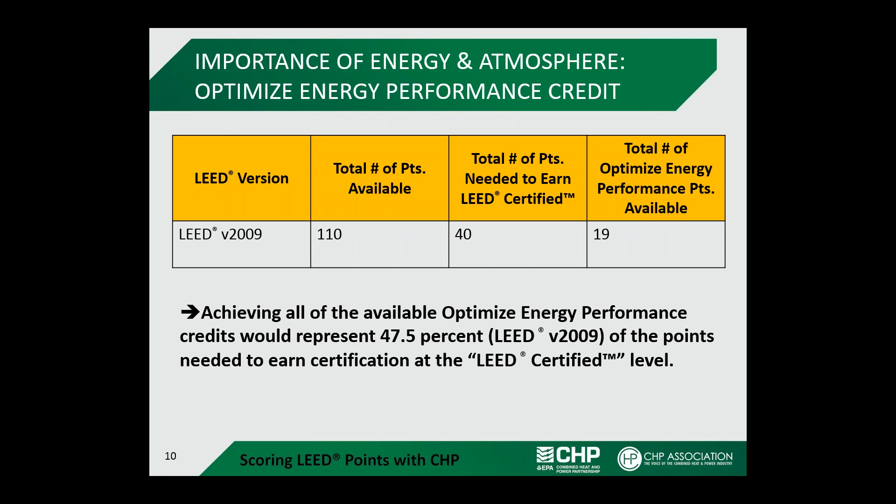One thing to point out is that every project is different, and the impact CHP will have is dependent on building-specific variables, such as the performance parameters of the specific system, how many hours the system runs, power-to-heat ratio, and the useful power and heat outputs relative to the specific building load.

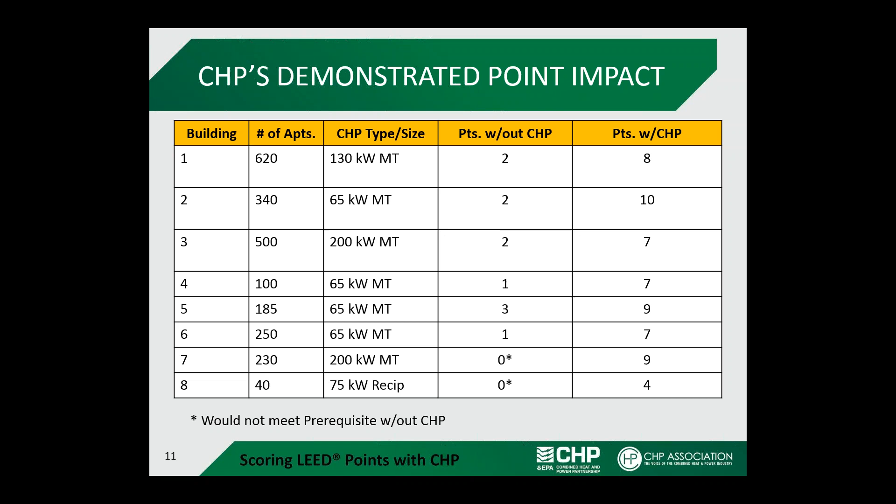As I mentioned, the credit category where CHP has the biggest impact is the Optimize Energy Performance Credit. Under this credit, project teams have 3 options for earning points. Options 2 and 3 are not really applicable to CHP. They involve implementing prescriptive measures outlined in ASHRAE Advanced Energy Design Guides, so CHP doesn't really help a project earn points under either of these options.

Option 1, however, involves running a whole building energy simulation using an energy model of a baseline building that meets the prescriptive requirements of ASHRAE 90.1 2007 and LEED 2009, and another model for a design building that includes all of the energy efficiency measures that a building plans to implement, which would include the CHP system.

For people who aren't aware, ASHRAE 90.1 establishes minimum requirements for the energy efficient design of buildings and provides prescriptive measures that define the minimum efficiency of things like building insulation, HVAC efficiency, etc. Meeting these prescriptive requirements is what establishes the baseline building for the purpose of comparison in the LEED calculation.

So using option 1, the design building must demonstrate a minimum of 10% savings in energy cost compared to the baseline building. Anything over a 10% savings results in points earned on an incremental scale based on the savings achieved. More points are awarded as energy cost savings of the design building increase compared to that of the baseline building. So the key point here is that points are awarded based on energy cost savings, not on energy unit savings.

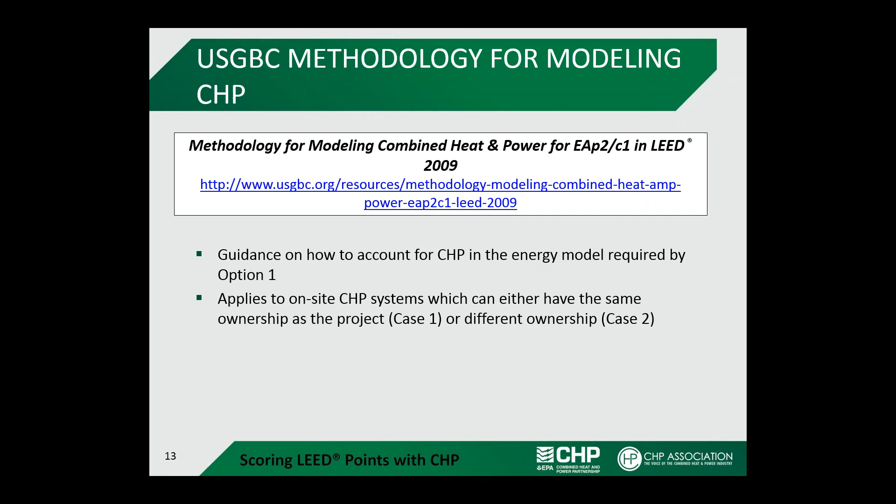Next slide. Basically, there are 3 steps to the methodology. First, the energy requirements for the baseline building, which is the one that meets the ASHRAE 90.1 standard, are estimated using the energy model, and based on the model output, energy costs are calculated.

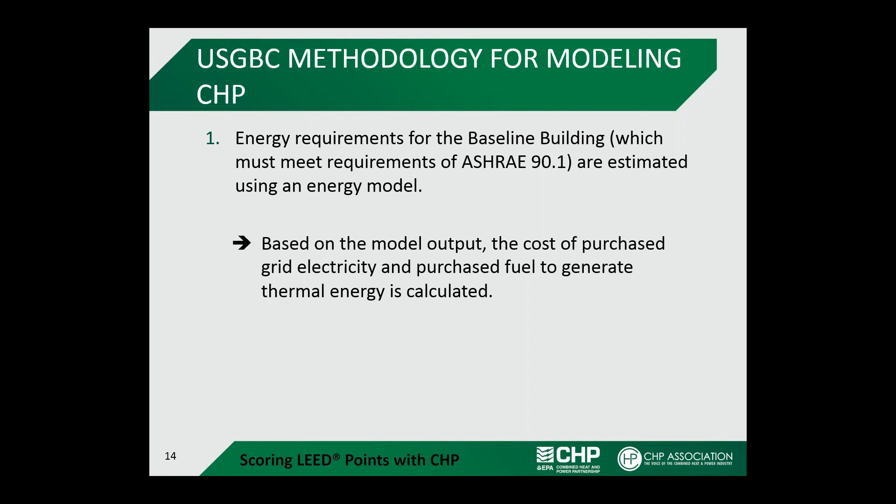The same process is followed for the design building, the one that includes CHP, as well as any other energy efficiency measures the project plans to implement. The key is that the design building with CHP only needs to account for the cost of fuel used in the CHP system, plus any residual utility electricity and supplemental thermal needed by the building. The electricity and thermal outputs from the CHP system are considered free in the energy cost comparison, which is important.

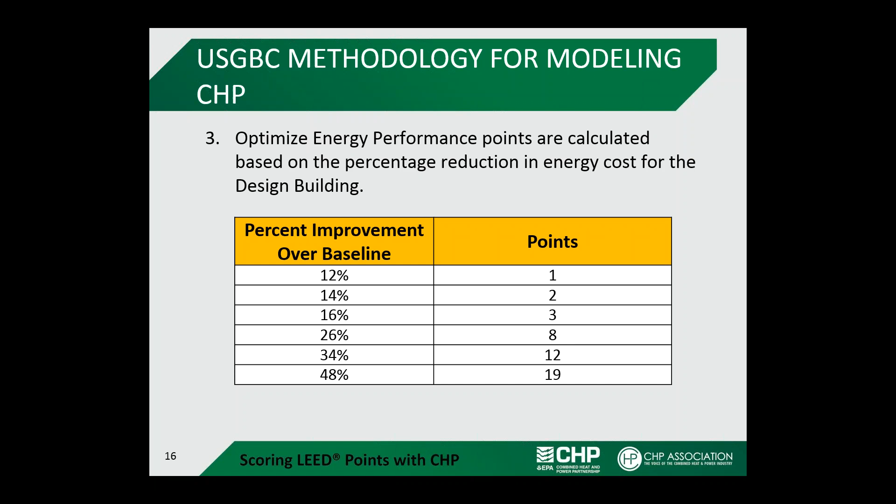The key behind CHP's ability to earn points is its enhanced efficiency over separate heat and power, meaning purchased utility electricity combined with an on-site boiler. CHP systems typically achieve total system efficiencies of 60 to 80%, compared to approximately 50% for purchased utility electricity and an on-site boiler combined. Increased efficiency means less fuel and thus energy cost savings. Also, by producing on-site power, CHP reduces purchases of grid electricity. Purchasing natural gas, the usual fuel for CHP, is typically cheaper than buying grid electricity, so you get cost savings.

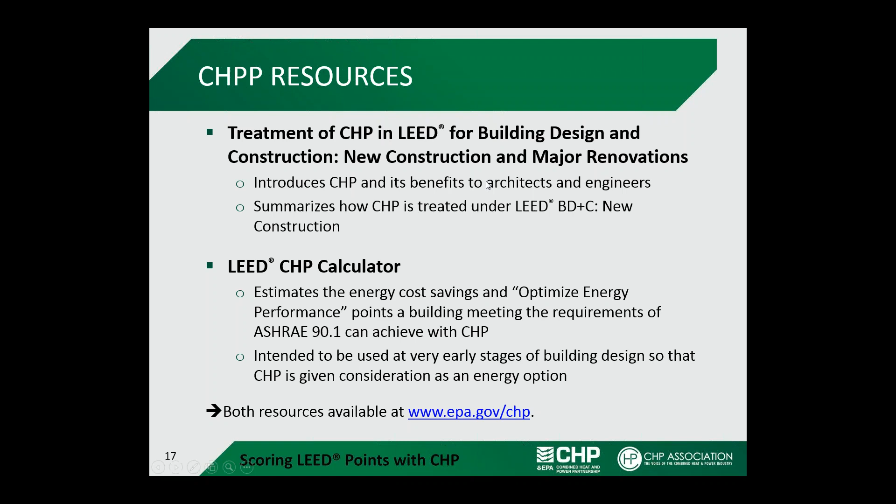That about covers it, but I'd like to finish with a few takeaways we think are important to leave everyone with. First, CHP can have a dramatic LEED point impact. We've seen projects earn up to 9 to 14 points with CHP compared to separate heat and power, which is really significant given that you only need 40 points to become LEED certified.

Second, CHP has lots of other benefits for buildings: energy cost savings, environmental benefits, enhanced power reliability. So getting these extra LEED points is really a bonus—you're going to want to implement CHP for a number of other reasons besides just getting LEED points. We also hope that for your next LEED project, you think of CHP from the outset as a potential energy strategy. It requires some planning and investment up front, but the benefits to a building owner can really be big. Finally, we at the CHP Partnership are here to help.

We have lots of tools and resources concerning CHP, including the ones I just went over specific to LEED, as well as a partner network of CHP professionals. I'd really encourage you, if you have any questions or would like assistance understanding how CHP fits within the LEED rating system, to please contact us. My contact information is on the next slide, as well as how to contact the CHP Partnership. So if you have any questions, feel free to contact us either way.

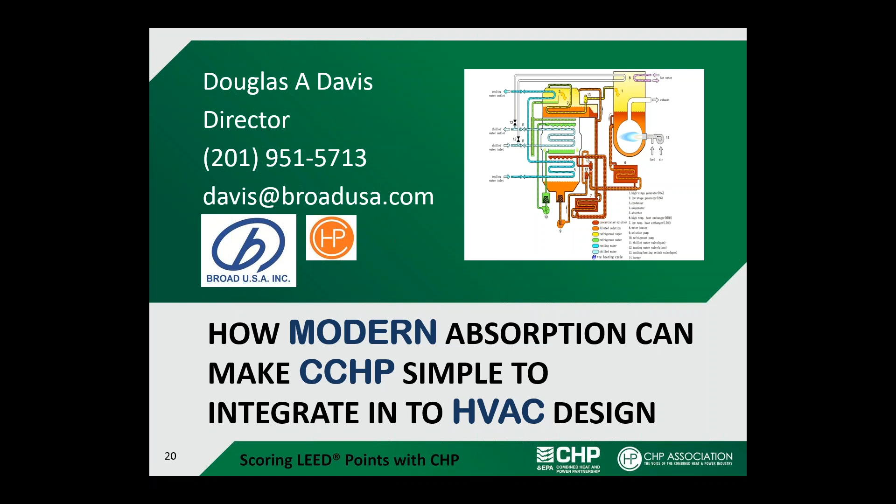The next 10 minutes or so, we're going to talk a little bit about how modern absorption can make CCHP simple to integrate and design into your HVAC systems.

To begin with, I thought it'd be good to state what an absorber is. Basically, an absorber is a thermally driven chiller that makes cold water. Typical application range for the chill water is about 44 degrees Fahrenheit and is usually adjustable a couple degrees in both directions.

Commonly, absorbers have been applied in buildings for almost any type of facility, ranging from schools to universities to hospitals, offices, retail, and data centers. We are seeing a big growth in the CHP market. I'd say about 70% of absorption sales today is tied to some form of heat recovery or combined heat and power projects. Absorbers have been around for a while.

They're also known by a couple other names, such as absorption chillers, or perhaps if a machine is actually burning natural gas directly, people often refer to them as chiller heaters, since they not only produce cold water for air conditioning, but they can also create hot water for heating a building or even domestic hot water.

Lastly, I was hoping to touch lightly on what's new about modern absorption units. Over the last decade or so, the efficiency of the technology has gotten substantially better than it was in the past, and also its ability to unload quite efficiently. Today, with an HVAC application, it's really important for machines to be able to unload from 100 down to 10% as the load profile in the building changes.

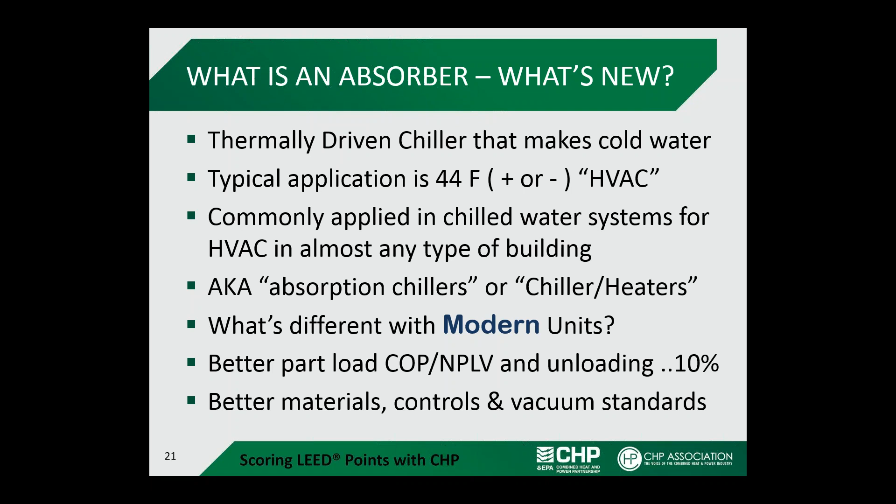So absorption has been around for almost 70 years now. This technology was actually pioneered in New York State, and what we're hoping to show here is just a couple pictures about how the technology has changed in the last decade or so.

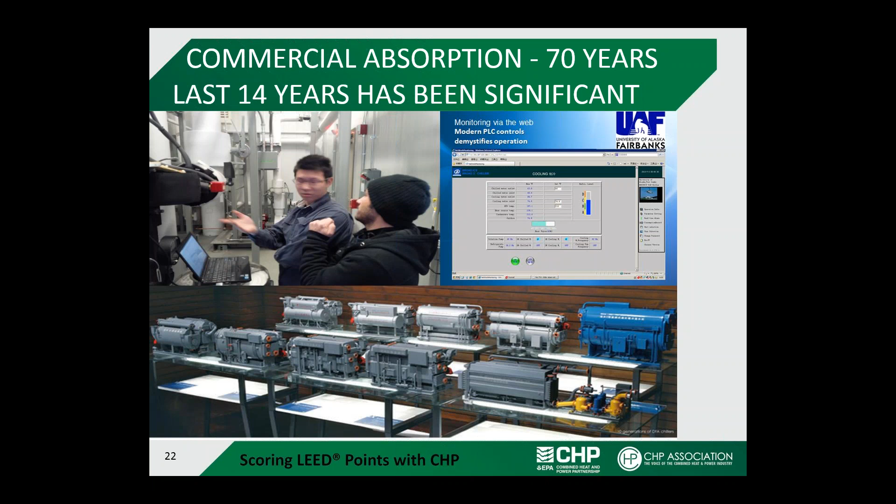Modern absorbers today are about 40% more efficient than they were 15 years ago, and as you can imagine, information technology has really transformed this technology into a much more user-friendly chiller, in the sense that modern controls and using the internet to actually watch these machines remotely really allows the operation to be demystified. It's kind of simple now for almost anyone, even with a very basic understanding of chill water operation, to be able to diagnose and troubleshoot machines should they need a little bit of TLC.

Next slide. So a little bit about our company. Broad is a manufacturer of absorption chillers. We also monitor these machines for life and provide service and training on absorbers.

What really is truly novel about absorbers today is they can actually handle up to 3 different thermal inputs, which really makes them ideal for combined heat and power applications, where you might have various different forms of waste heat that need to be recovered and utilized in air conditioning. Next slide.

So to highlight why modern absorbers are good for LEED projects: many building designs have traditional heat loads that can make CHP effective, but depending on where the building is located and the time of year, many commercial office buildings or hospitals will have a dramatic drop-off in heating requirements in the summertime. By turning cooling loads into thermal chillers, you can turn cooling loads into heat loads, which allows you to recover waste heat off power generation and drive the energy back into the building for a useful purpose.

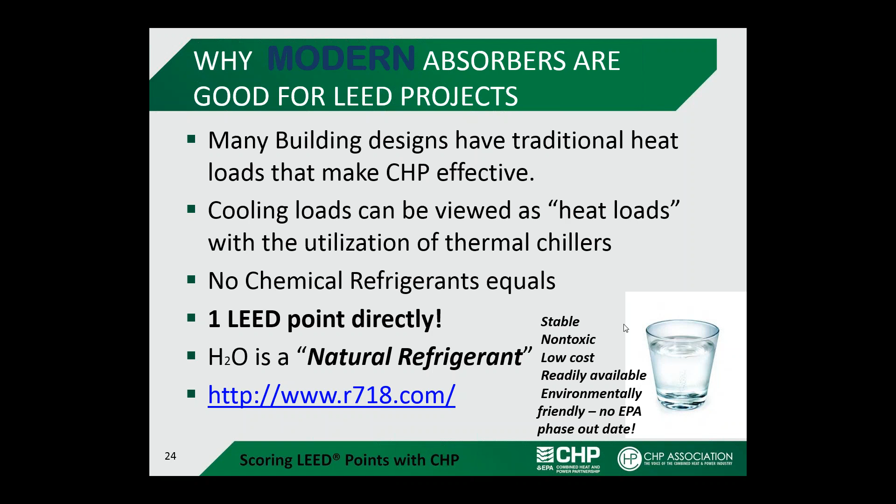In most combined heat and power systems, the job generally begins with the selection of a prime mover. Depending on the type of prime mover you design your system around, you'll have various forms of waste heat. But the key factor is all these different forms of waste heat can be used to power a modern absorber. One of the new prime movers we're starting to see traction with in North America are fuel cells. Not all fuel cells, but some, as a byproduct of a chemical reaction, actually generate hot air around 750 degrees, which is more than enough heat to power a two-stage high-efficiency absorber.

Another popular choice for prime movers are turbines, both large or small, sometimes referred to as microturbines. Again, the byproduct of combustion of natural gas generates sufficient heat to power usually a double effect absorber, or you can convert that waste heat into steam or hot water and then choose either a single or two-stage absorber.

Also, reciprocating engines by far seem to be a very popular choice still in the combined heat and power industry. Just like the car you drove to work today, you have both tailpipe exhaust and what's commonly referred to as jacket water, which keeps the engine block cool. Typically the exhaust temperature off the tailpipe might be 800–900 degrees, and the jacket water usually somewhere around 200 degrees, both sufficient amounts of heat to power a modern absorber.

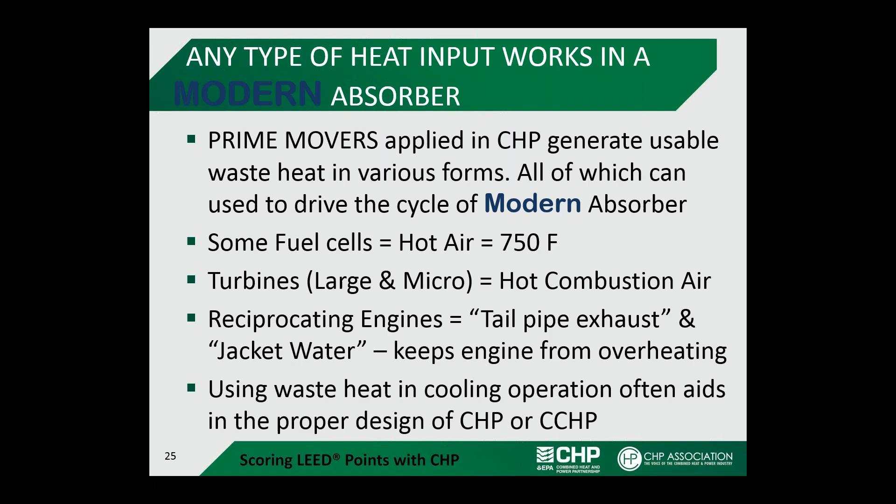So to summarize, by looking at thermal chillers, you can often use the waste heat in cooling operation, and will sometimes add to the size or capacity of the combined heat and power system, because you'll be able to utilize the waste heat in months where the heating load might fall off.

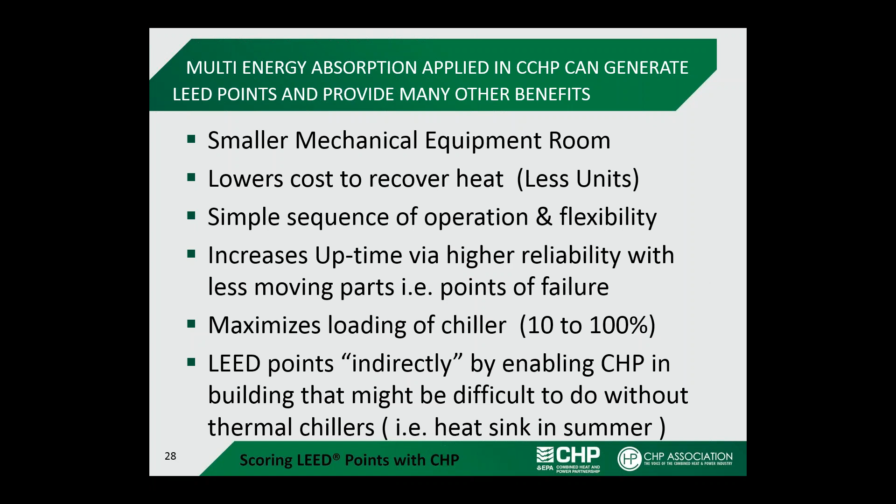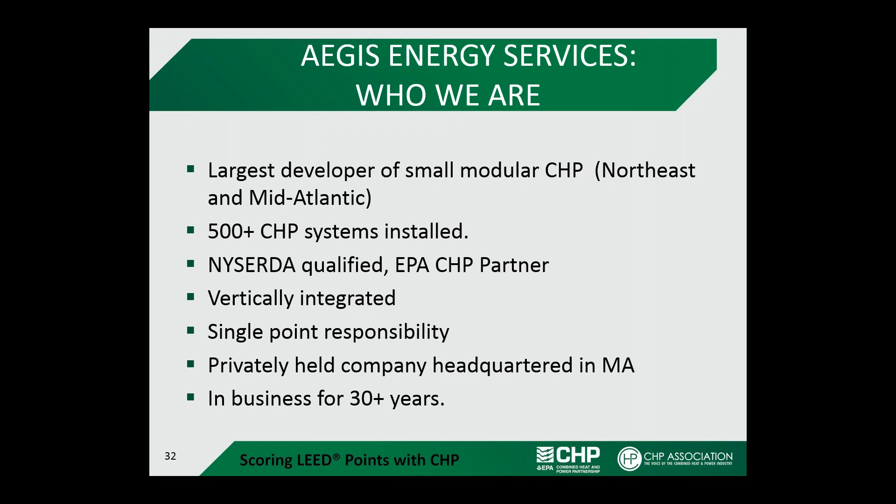The company is vertically integrated from engineering, manufacturing, installing, maintaining, and often owning and operating systems. This structure provides single source responsibility and accountability to its clients. It's a privately held company headquartered in Massachusetts. It's been in business for over 30 years. Next slide, please.

This is the basic architecture of our products, which are natural gas-driven reciprocating engines. In red are the basic heat recovery components. In green are the connections we use to interface with the building. I want to call attention to the red circled outputs of the system, which are highly valuable electricity and thermal energy. When comparing the total BTUs of these outputs with the natural gas input BTUs, the efficiency can be 80+%, which should be contrasted with the 30% efficiency of a central power plant.

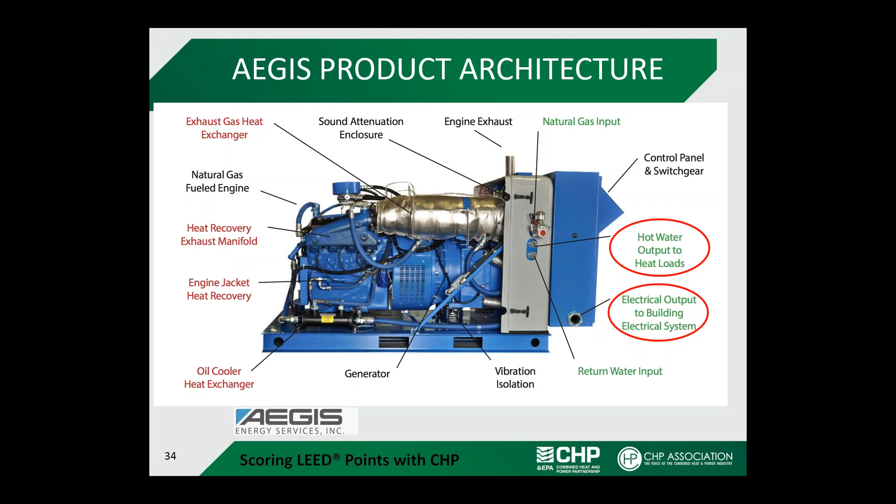Our CHP systems are modular and scalable, which means they can be used alone or combined for use in larger applications. Sizing the system for thermal loads and electrical loads requires proper sizing for maximum efficiency and savings. With small modular systems, there is no need to purchase and install something that doesn't fit or is oversized. Consistent with plug and play is the fact that most of the system and connections are pre-built in the factory, such as the pump and load modules, making installation relatively quick.

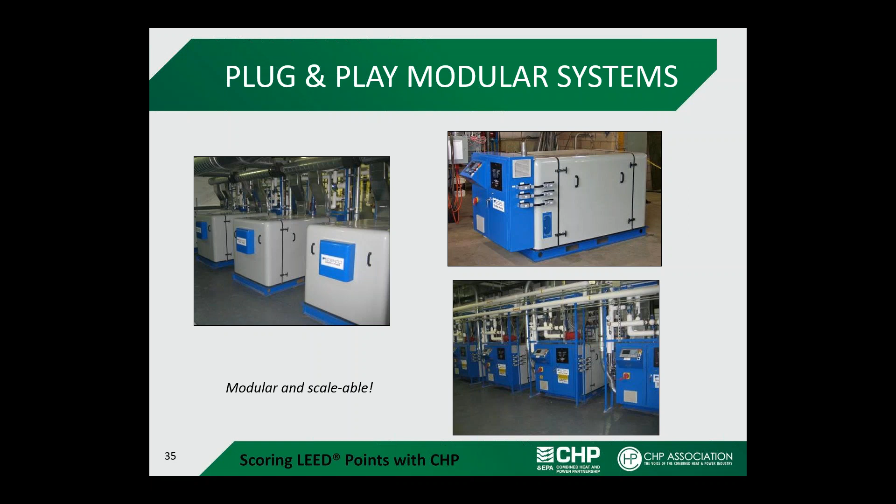These units are equipped with microprocessors and are IP accessible, which allow them to be remotely monitored by Aegis at its headquarters, thereby allowing for very high run times and capacity factors, making sure that the promised energy savings are achieved. This monitoring allows for independent operation, not requiring any building resources. Lastly, Aegis provides a comprehensive maintenance program, thereby ensuring long system life and uptime.

Since not every building is a good application for CHP, although many are, these are the characteristics that make a site a good fit for CHP. These characteristics make CHP a great technology for multifamily buildings, hotels, hospitals, nursing homes, health clubs, all of which are our clients.

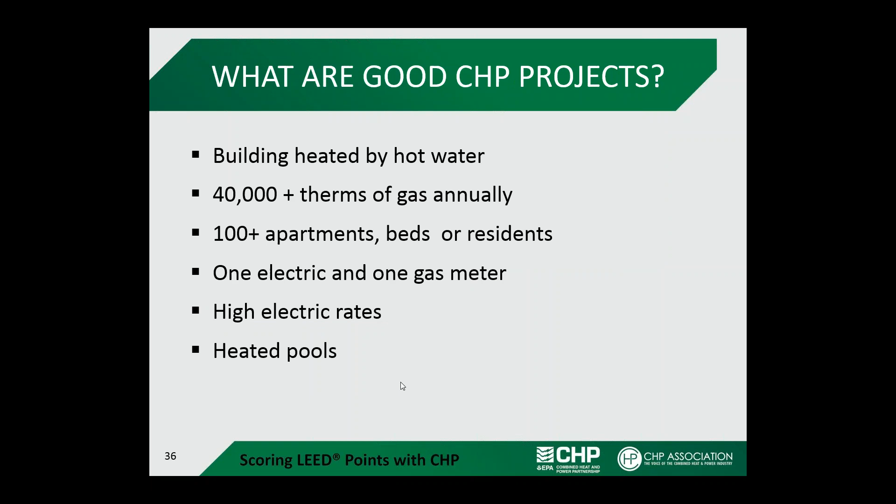Here is a quick review of the guiding principle of CHP design for maximizing energy savings. As discussed earlier, the value of CHP lies in its high efficiency, which stems from use of the waste heat that the engine produces. Therefore, in order to maximize this efficiency, the system is best designed to be thermal load following as shown.

Aegis initially sizes an overall CHP system to match the building's thermal needs. It employs hot water storage tanks for peaks. The CHP modules are adjustable, have variable speed in order to match the building heat and hot water. If the thermal demand drops below that level, the system pauses to avoid heat dump. The only time there's a heat dump is if the building is performing electric peak shaving.

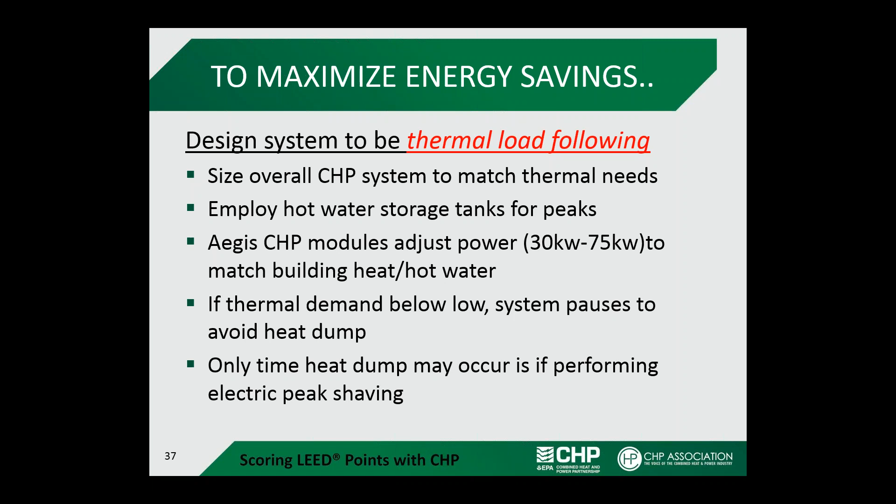Let's start with the first of two case studies that I wish to present. The first is the case study called the Larstrand in New York City, which is a 184 residential unit and retail space building, 200,000 square feet with 24 stories, consisting of market rate and affordable rental apartments. This building is in its final stage of comments, awaiting silver certification. Aegis worked with Dagher Engineering, which was an engineering firm that helped design this building.

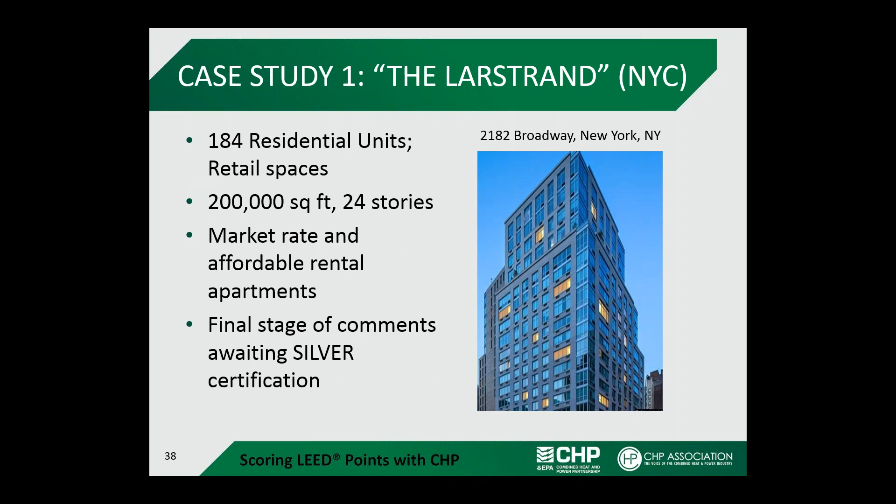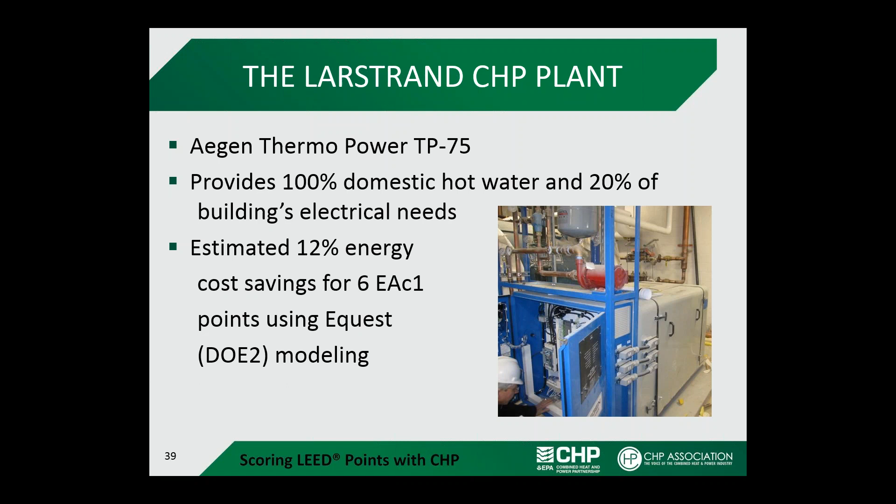After reviewing many different options for energy savings and employing some building envelope and other strategies to earn the minimum energy credit of 1 point, Dagher and Aegis performed a feasibility study showing building thermal demands and electrical demands versus CHP output. That study pointed to a strong argument in favor of CHP. Subsequently, Aegis engineered and installed the CHP plant as shown, with one Aegis ThermoPower TP75 kilowatt unit, which provides 100% domestic hot water and 20% of the building's electrical needs. The estimated 12% energy cost savings provided 6 optimized energy points using an eQuest DOE2 modeling program.

Here's a worksheet that Dagher gave us showing the actual point contribution that CHP earned towards the overall certification. Essentially, they earned 1 point in the minimum energy credit by saving 12% over the baseline building by employing building envelope and other strategies. Then, post-CHP, the building saved an additional 12% using CHP. This combined 24% gave them an additional 6 points under the optimized energy performance category.

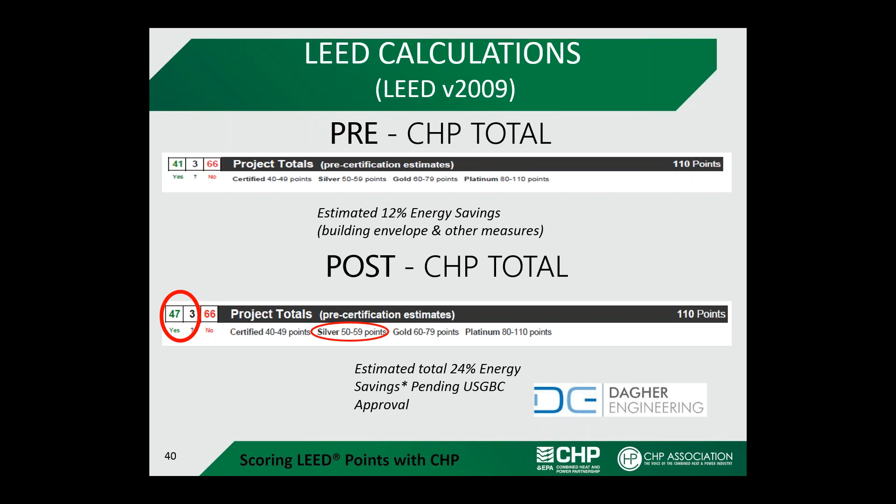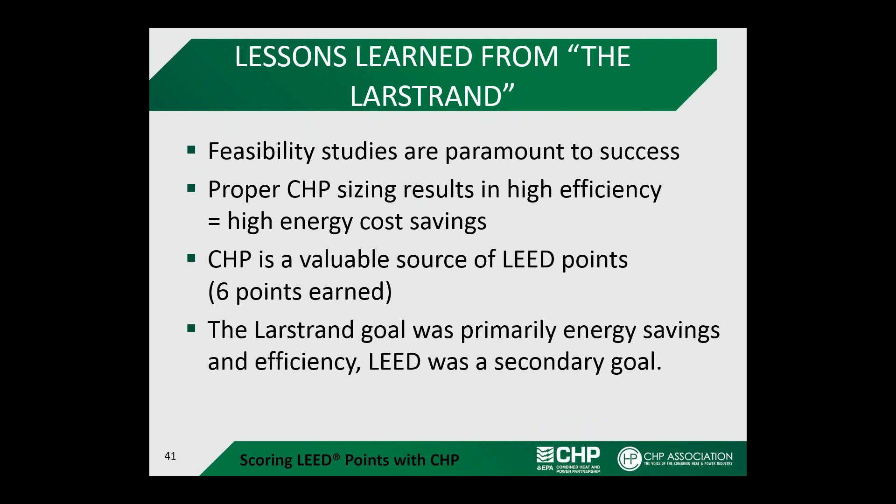In speaking with the engineers at Dagher and the building developers, we gathered these lessons learned. First, that feasibility studies are paramount to success, and that proper CHP sizing results in high efficiency and high energy cost savings. CHP is a valuable source of LEED points, and the Larstrand goal was primarily energy savings and efficiency. LEED was a secondary goal.

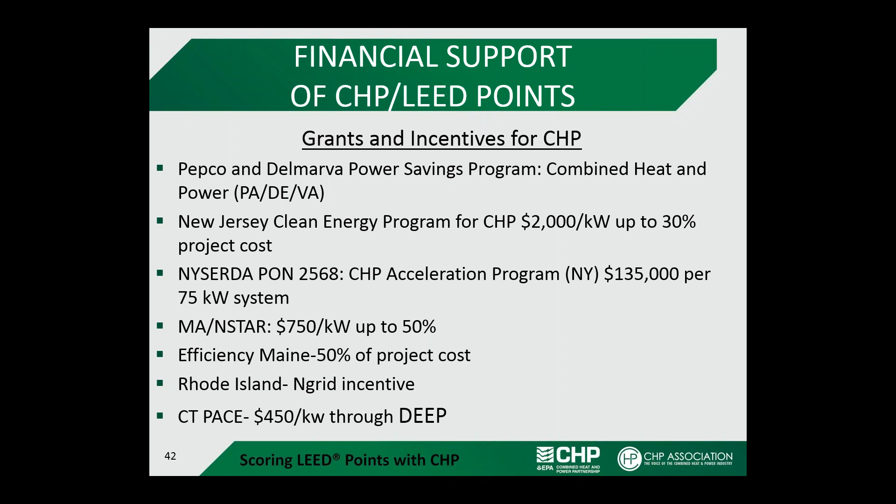Let me take a break here to briefly discuss some financial support for CHP projects. Many of you are aware of the incentives given to solar and wind, but you may be surprised that CHP has also support from local, state, and federal governments as well as utilities. Here is a small sample of what is available.

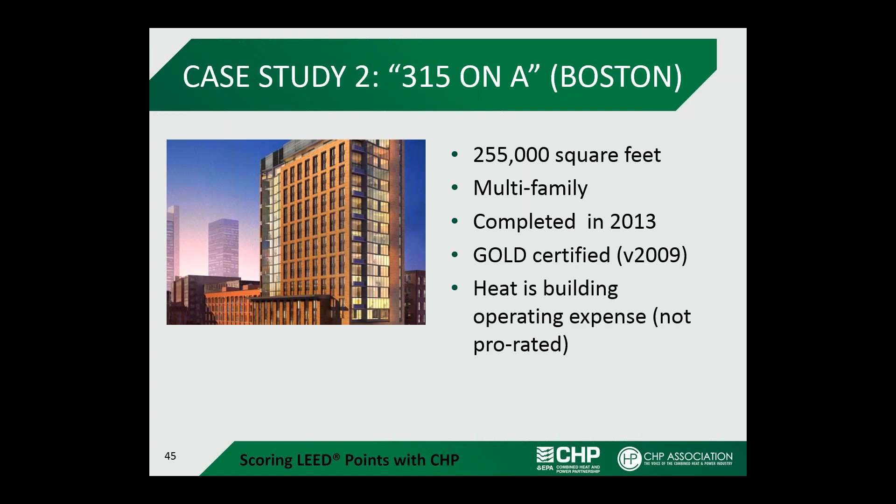This case study is a building called 315 on A, located in Boston. This building employed a shared savings agreement with Aegen, as was previously discussed. This is a 255,000 square foot multifamily building, completed in 2013, and has been gold certified under the V2009 LEED system. The heat in the building is an operating expense and is not prorated back to the tenants.

A feasibility study was conducted early on here also and rendered support for CHP as a good fit for this building in order to reduce energy costs. The plant consists of an Aegen ThermoPower 75 kilowatt system. It provides 100% of the domestic hot water heating and 80% of the building heat. The system provides 28% of the building's electrical load. The CHP system earned 4 of the 8 points under Optimize Energy Performance Credit, very similar to the previous case study I presented.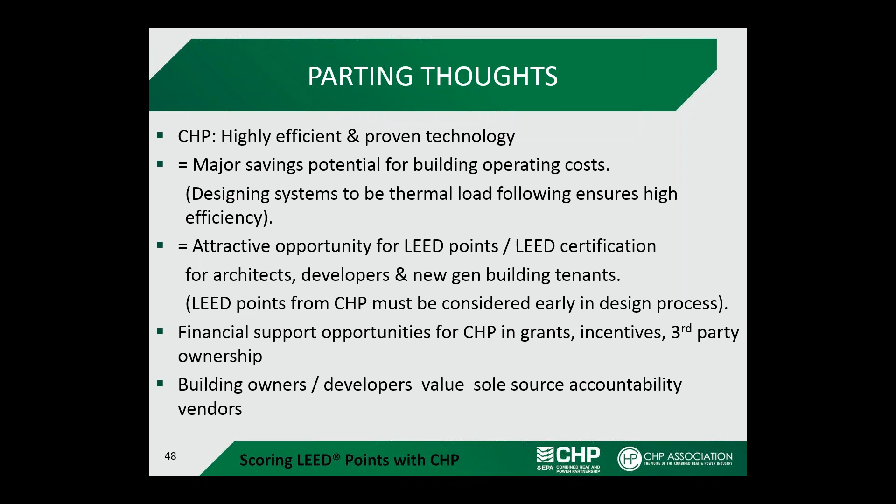Some parting thoughts. CHP is a highly efficient and proven technology, thus resulting in major savings potential for building operating costs, provided that the systems are designed to be thermal load following. These savings present an attractive opportunity for LEED points and LEED certification for architects, developers, and new generation building tenants who expect to live in LEED buildings. As mentioned earlier, these LEED points from CHP must be considered early on in the design process. Financial support opportunities exist for CHP in the form of grants, incentives, and third-party ownership, and building owners and developers value sole source accountability vendors.

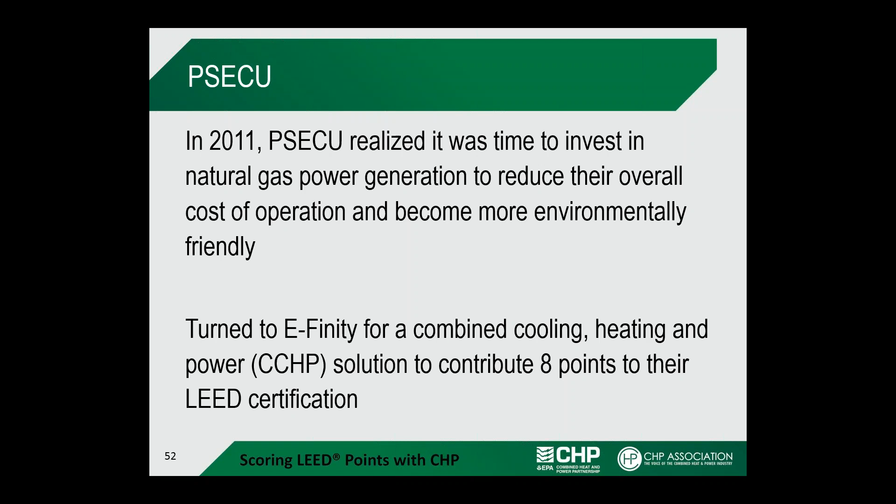In 2011, PSECU realized it was time to invest in natural gas power generation, benefiting from shale gas in the Marcellus region not far away, and they incorporated that into their overall cost of operation to become more environmentally efficient. They turned to us with an interest in the Capstone microturbine for a combined cooling, heating, and power system solution, and that overall solution contributed 8 points to their LEED certification.

It took about 3 years of schematic design and development to put the picture together for the combined heat power portion. Alan Bruner, the project manager at PSECU, was committed to the project along with the CEO, and Pete Spicer, the facilities manager. You need that commitment in any CHP project to have those champions to move a project forward. The plant was started in October of 2013. It's one of 352 buildings in the state of Pennsylvania that holds a gold certification level.

Requirements for the system: PSECU was looking for reliable on-site electricity, space heating, cooling, and chilled water. They teamed with us and UGI Performance Solutions, a local energy services company, to develop the generation solution, which utilized the Capstone natural gas-powered microturbine. In their case, it was a C800, which I'll speak to.

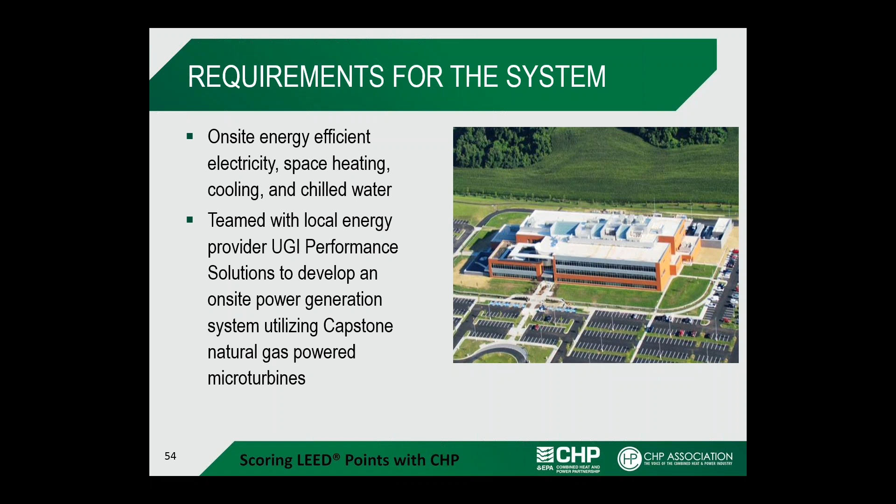The certification optimized the performance of the building that generated approximately 37% energy savings due to the on-site cogeneration system.

The system is comprised of really just 3 components: the Capstone turbine, the C800 dual mode microturbine as the prime mover, with 4 separate C200 modules in there that allow the unit to scale up or down depending on the thermal priority need of the building. The engine will run all year long, even during maintenance cycles, because you only shut one of the 200s down at a time. So the client enjoys thermal and electrical production 24/7, which also adds to the 99.999 available reliability.

The turbine exhaust is then pushed over to a diverter valve that will divert to either a 250-ton exhaust-fired absorption chiller, or simultaneously divert to a 4 MMBTU hot water heat exchanger. So depending on what the building automation system is calling for - hot water, chilled, or hot air or chilled air - the turbine will deliver air to the heat exchanger and the absorber simultaneously to meet that demand. That operation is controlled through the mTIM, the PLC control system.

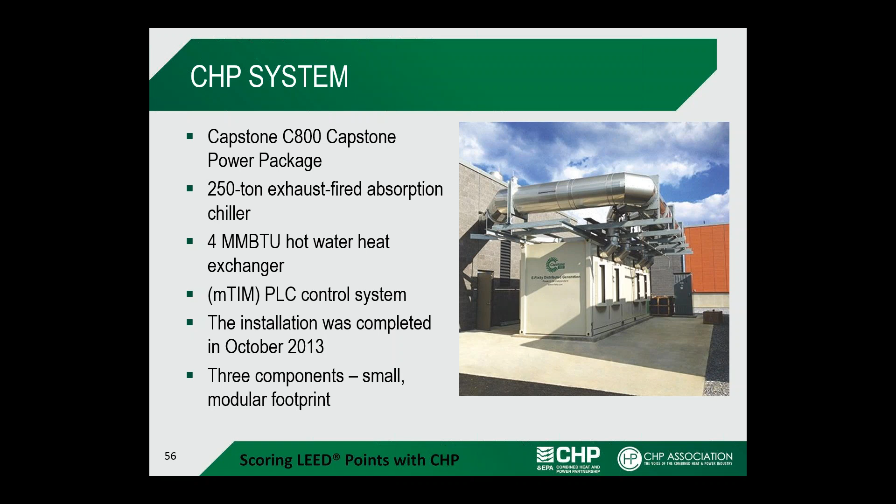The installation got completed in 2013. We handed the keys over to Pete Spicer and his operations team. Again, 3 components, a very small modular footprint: a turbine, an absorber, and a heat exchanger.

Quick snapshot of the flue gas fired absorber - pretty decent sized footprint, approximately 12 feet high, 8 feet wide, 10 feet deep. The heat exchanger is approximately 8 feet high, 6 feet wide, 6 feet deep.

Again, very small modular footprint, and we've seen the ability for the Capstone to make hot water and feed that over to a hot water fired absorber, or to make flue gas and feed it to a flue gas fired absorber and a flue gas benefit heat exchanger. So the options exist for hot water fired absorption, steam absorption chillers, and flue gas fired.

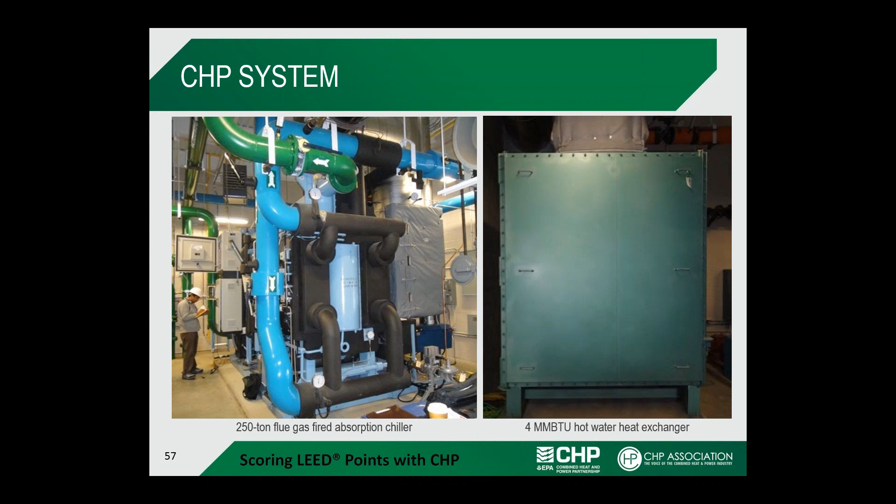So the system is operating, providing standalone clean power for their data center. It also operates in dual mode, which has the ability to communicate with the utility grid. If it senses a voltage sag or a utility anomaly, the unit will open a breaker and disconnect, islanding the site into island mode and continue to operate.

Turbines never shut down. They merely take the command and go into isolation through the breaker, and then continue to produce electricity and thermal energy. That electricity, in this case, provides backup power to the data center UPS, and the thermal energy is for heating and cooling in the building.

Through the Capstone remote monitoring program and service program, the customer decided to select a 9-year FPP - we call it our preventative maintenance program. If there's a fault on the system with remote monitoring, we receive through our call center in 40 seconds an alarm that identifies the site, the serial number of the turbine, and the fault code. We can tag in remotely, wake it up, restart it, or load software. If we can't, we dispatch.

Again, the 9-year FPP includes an engine overhaul. We have programs out to 15 years.

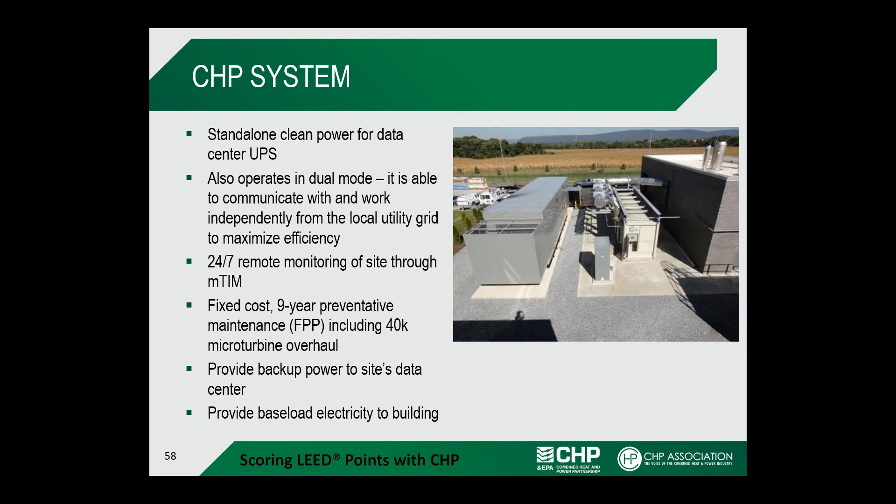Some of the benefits and drivers for our air-cooled, air-lubricated microturbine is that they are just that - air-cooled and air-lubricated. So we shut them down maybe 2 to 3 hours a year for maintenance. Again, it's only the unit that needs to be serviced.

They offer very low emissions. Our current product is 9 ppm, which is what PSECU has. They have the ability to get down to 5 ppm on NOx, so extremely environmentally friendly.

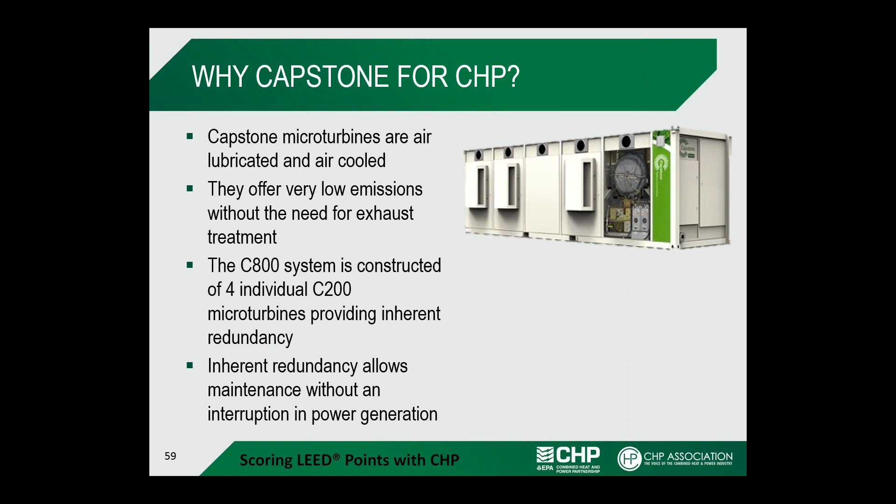A benefit to having multiple 200s inside the container - this one is a C800, so it's got 4 individual C200s. It's expandable to 5 without any additional real estate. The multiple engines provide inherent redundancy, which allows for maintenance to be done without interrupting power generation or thermal generation.

The controller for the system is a PLC-based controller developed by Capstone and E-Finity. It provides real-time energy data and production, allowing the PSECU and anyone remotely to see the information. It also acts as the backbone between the multiple turbines.

It allows us to remotely change it from thermal priority to electrical priority. It'll always shut down the turbine with the highest run hours when the demand on the site is not high enough to run all 4. The next time that sequence occurs, it'll shut an opposite engine down. So it's very robust and allows us to even out the runtime on the turbines.

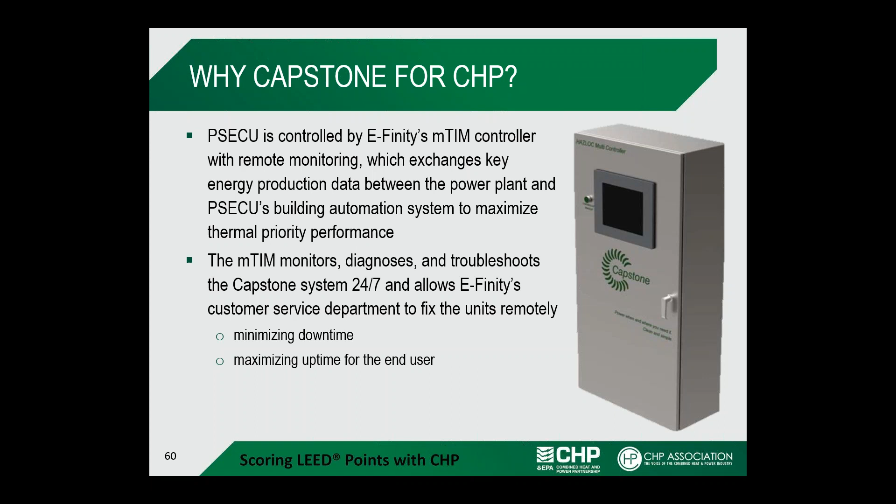It diagnoses and troubleshoots 24/7, so it really becomes our hook with our online connectivity, allowing us to minimize downtime and maximize uptime for the end user.

So in closing, the final numbers at PSECU: gold status, 8 points. It's an 800 kilowatt gross electrical capacity, 4.25 MBH of thermal output hot water, 250 tons of chilled water, and the carbon reduction you see is just there. CHP does that for customers all the time.

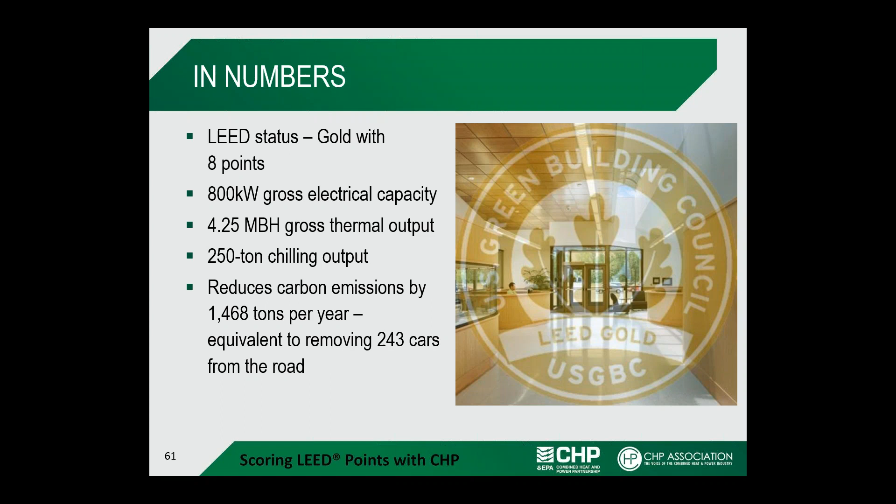I will say that the company, through Pete Spicer and Alan, is committed to demonstrating the value of the plant. They show the site regularly, and they've done everything to create a great project out there at the PSECU. I think that's the wrap-up.

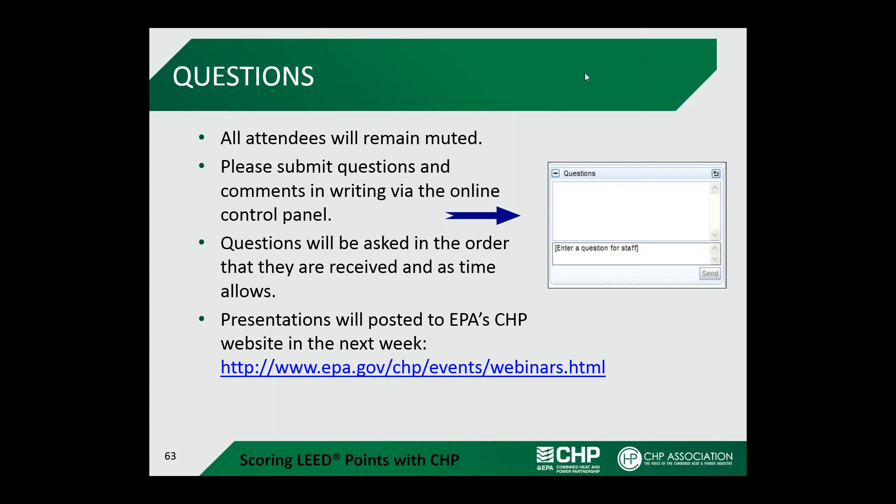With respect to the central plant, from what I've seen and heard, getting the central plant only certified can be difficult because it doesn't really have a large load compared to the energy it's producing. It's really exporting a lot of the energy to outside buildings. There is a district energy methodology that USGBC has developed to account for CHP energy from a central plant going to outside buildings, but it's really a way to help certify those outside buildings. Again, it's just the nature of how the central plant as a standalone building operates. It can be difficult to certify, but that's not to say it hasn't been done. That's all I could say about that question.

Thank you, Charlie. We have a question for Diane, and also Doug or Jeff if you know the answer. Do you know of installations where building officials or fire life safety plans examiners have allowed CHP to power features required to operate during a power outage, instead of on-site fuel storage power generators? Any volunteers?

I'll take that. Life safety usually requires either a liquid fuel or a dual fuel aspect, in my knowledge. So a straight natural gas CHP system would not be allowed to fire the fire pump. I could be wrong, but that's generally the response I'm aware of. Anybody else want to weigh in on that?

Diane, I have a question for you. What are sole source vendors?

When I say sole source vendors, I mean sole source accountability vendors, in that a company like Aegis takes charge of the CHP installation from engineering all the way through to manufacturing, installing, and maintaining, as opposed to vendors out there that just sell other people's equipment at an arm's length transaction. Our experience has shown that our clients typically prefer to have someone who is a single point of responsibility. Does that make sense?